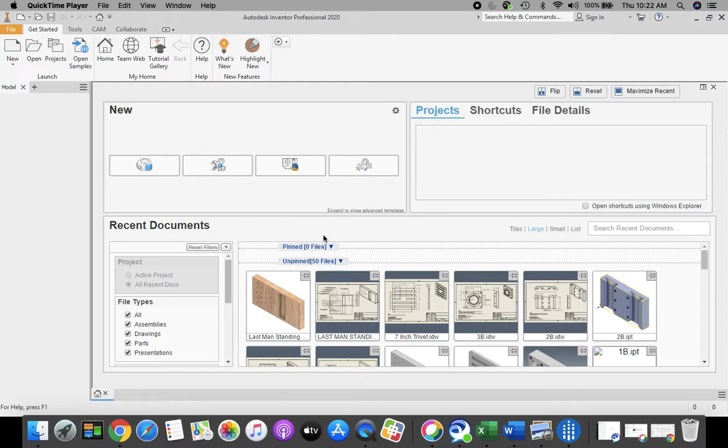Today we're going to take a look at creating the toolpath for your last man standing game so we can cut it on a CNC mill. To begin with that, we're going to come up to our ribbon bar at the top and we're going to select open, and we're going to go to our H drive, first initial last name 000 where you saved it, and we're going to select our last man standing with our last name. Click open and it will load for you shortly.

Now, we're still in the drawing area, the CAD area of Inventor. We're going to change to the CAM area. So if you go up to the top above the ribbon bar, you're going to find these tabs along the top. We're going to change to the CAM tab. Once we're in the CAM tab, the first thing we need to do is go up and set up our toolpaths. So we're going to go up here to the top ribbon bar and we're going to click Setup.

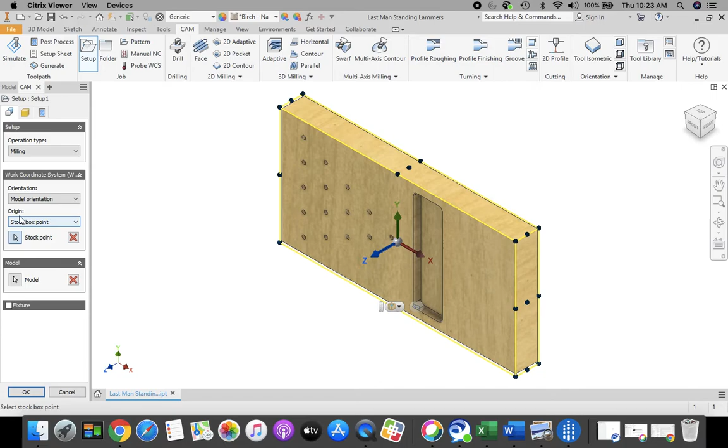Our model browser in the left-hand side of our screen changes. And what we want to do in this menu, we want to work from left to right across the tabs, and each tab we want to work from top to bottom. So this first tab, we're going to change the origin from stock box point. We're going to change it to model origin. That shifts the origin to the lower left-hand corner.

Going to the next tab across, we're going to change where it says stock offset mode. We're going to choose this menu here and we want no additional stock. And you can see that enters in our block dimensions correctly. Then we're going to come to our third tab, and where it says program name or number, we're going to highlight what's there and we're going to type in last man standing and your last name. Once you're finished with that, select OK from the menu at the bottom, and there's our setup folder right in there.

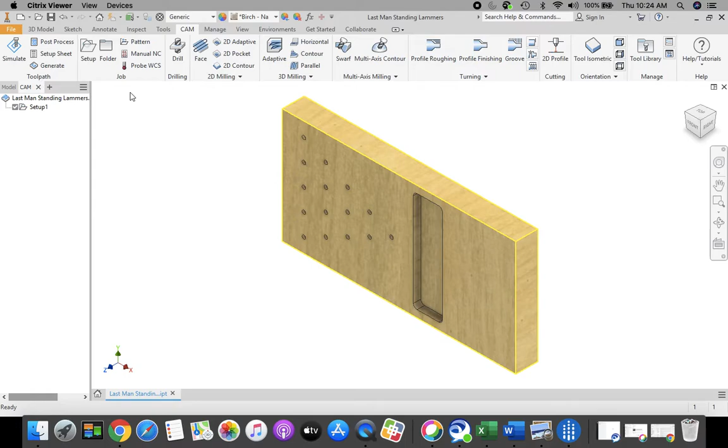The next thing that we need to do is we're going to take a look at drilling the 15 holes that are in here, and then we're going to pocket this area next. So in order to do that, we're going to go up to our ribbon bar and we're going to find our drilling option. Once again, these tabs we're going to work from left to right, touching every single tab, and we work each tab from top to bottom. The first thing in this tab we need to do is select our tool. So we're going to click Tool, and our tool menu is going to open up.

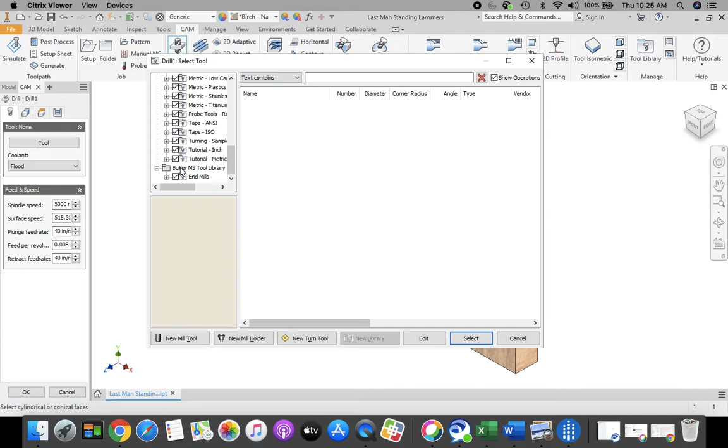Now, we previously added tools to this. If you scroll all the way down to the bottom, you should see Butler MS Tool Library. If you see Butler MS Tool Library, you can come up here and these 3 tools that are in here, you're going to choose tool number 1, which is 1/8 inch flat. If you don't see Butler MS Tool Library, I put them in a different spot for you. You can come up here and you want to find Sample Libraries and go to End Mills. And in the End Mills, you should see those 3 same tools. You want to choose 1/8 inch flat. And then at the bottom of this menu, click Select. And that shows the tool that we'll be drilling with right there.

Moving across to our second tab, it wants us to click the geometry. So we're going to come up and we're going to select each one of these 15 holes as it highlights. Just bring your mouse over the top of them or your cursor over the top of them. When it highlights, click to select it. Once you have all 15 of those clicked, we're going to come across to your next tab.

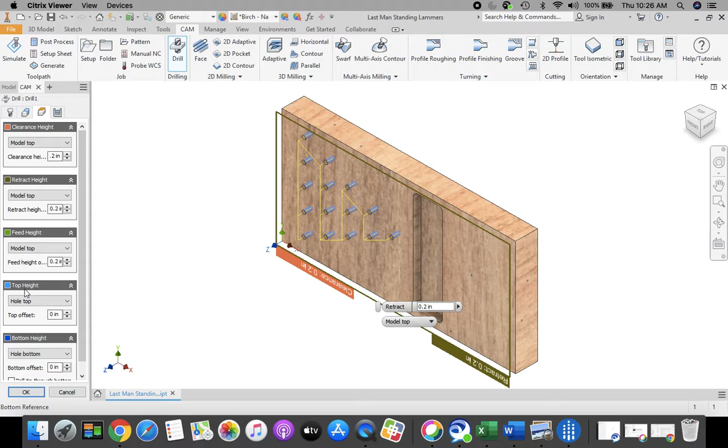On the third tab is when we establish our heights. We need to change these top 3 here. The first one was our clearance height. We're going to change to model top. And we're going to change our clearance height here to 0.2. Second one down, we're going to change from stock top. We're going to change to model top. 0.2 is what we want. And our third one for feed height, we're going to change to model top, and our feed height dimension is 0.2. When you're finished with that, let's go to our last tab across the top.

This one shows us that we're doing a drilling and that it's going to retract after it's done. Once you have those 4 tabs edited, we're going to come down to the bottom in this menu in our browser and we're going to click OK.

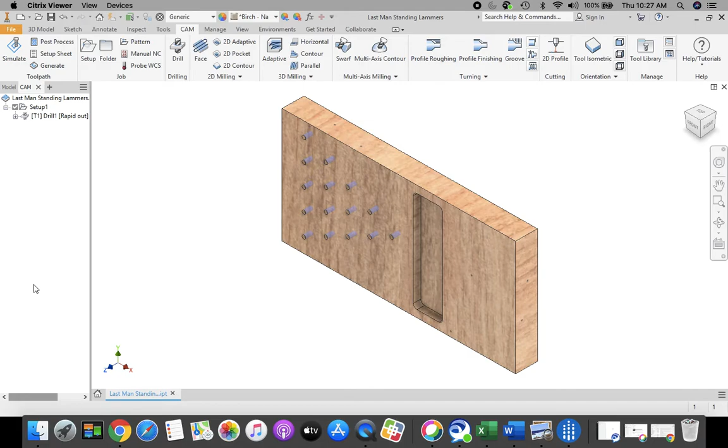If you would like, you can come up to the top for this operation, click Simulate. And then down here in the bottom of your screen, if you click play, it'll show you what that tool is doing to drill the holes. Pretty cool. Next, we're going to click close in this bottom left-hand corner of the menu.

Close out of simulation. Now we need to run the toolpath to cut this pocket for the peg storage. So we're going to come up to our ribbon bar at the top and we want to find 2D pocket. In our 2D milling area, find 2D pocket. Click to select it. Once again, these tabs across the top, we're going to work from left to right, and each tab we're going to go from top to bottom.

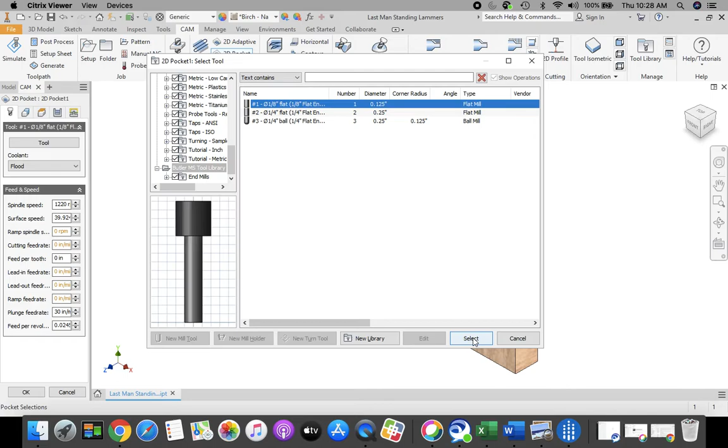The first thing we're going to do is choose our tool. Once again, you're going to scroll all the way down to the bottom to Butler MS Tool Library and select 1/8 inch flat, or you're going to go to the end mills in sample libraries and choose 1/8 inch flat. They're the same tools. Click select once you have that identified. Shows our tool again. Once our tool is selected, we're going to go across to our second tab where we're going to choose our geometry.

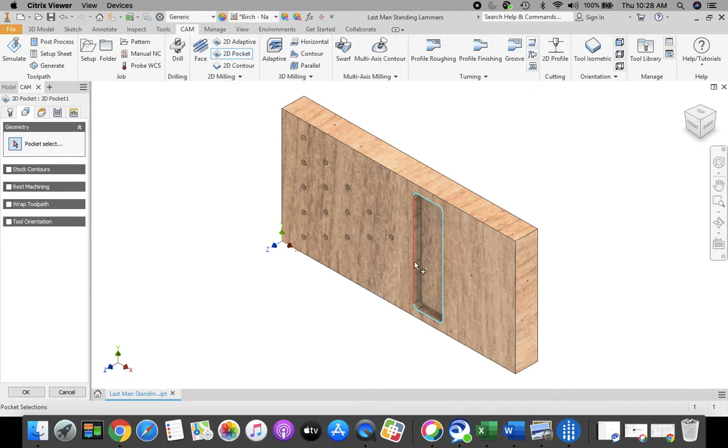Now when we choose our geometry, bring your cursor into your screen onto your part, and we want the bottom of that pocket identified. Make sure you're not clicking the outside edge or the side or the top edge. We want this bottom part highlighted and click. Going across to your third tab.

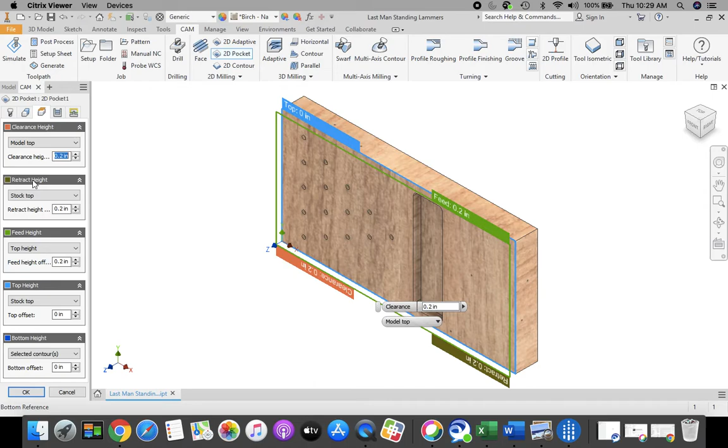We're going to change these top three once again, just as we did in the other one. We're going to change clearance height to model top, and this is going to be 0.2 for the dimensions. Retract height, we're going to change to model top and 0.2. Your feed height, we're going to change to model top and 0.2. Once you have those selected, we're going to move on to our fourth button, or fourth tab across.

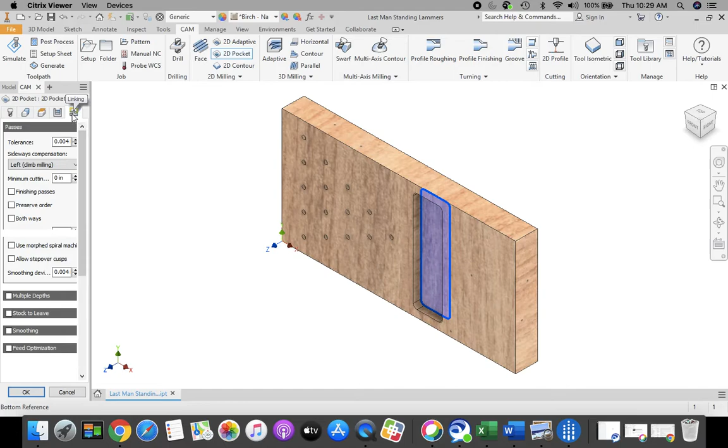In this one, we want to uncheck stock to leave. So we're going to machine right to the edge of our box. We're not going to have any additional stock. Moving across to our last tab, we're going to uncheck lead in, uncheck lead out, and we're going to change our ramp style from helix to plunge. Once you have those selected, click OK. And it's going to process those up here.

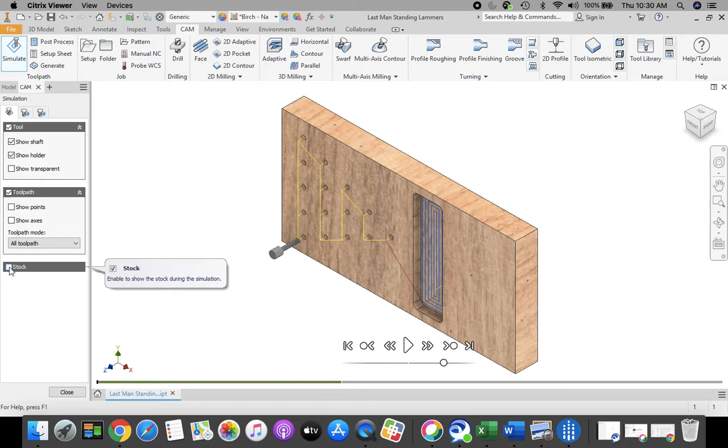When you're done, in order to see the whole tool paths run, click your setup, one over here in the model browser. Click simulate, that selects both of those operations. We can click stock over here on the left hand side. That turns your stock on, and then when you click play, it's going to run through and it's going to show you your tool paths as if the CNC mill is cutting it out.

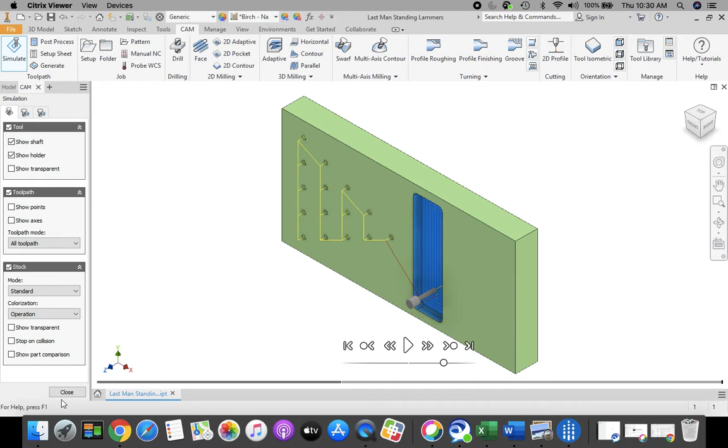Great job. Next thing that we need to do is we need to post-process this. Before we do that, we're going to close out our simulation window. Click close in the bottom left corner here. And we're going to come up to the top next to simulate, and we're going to select post-process. Here what we want to do is make sure this is saying 1_Butler MS Techno-Isel. That's the type of mill that we have.

We also want this output folder. We're going to change this. We want this to go to your H drive. So from the menu at the top, nothing's showing up here. So if you have nothing showing up here from the pull down menu at the top, we're going to go over to the side menu and we're going to select your first initial last name 000, your H drive.

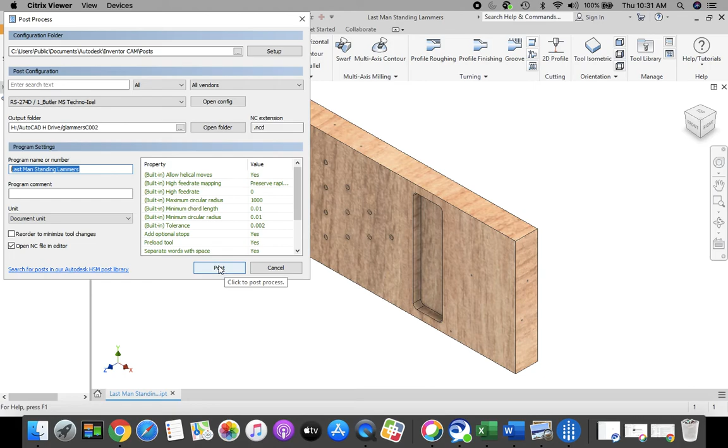And I am going to put this in my H drive. Okay, it doesn't look like anything's here, even though there is. We're going to click select folder. And then last man standing and your last name should be typed in there. If it's not, highlight this here and enter your name and last man standing. When you're finished with that, select post. Click save.

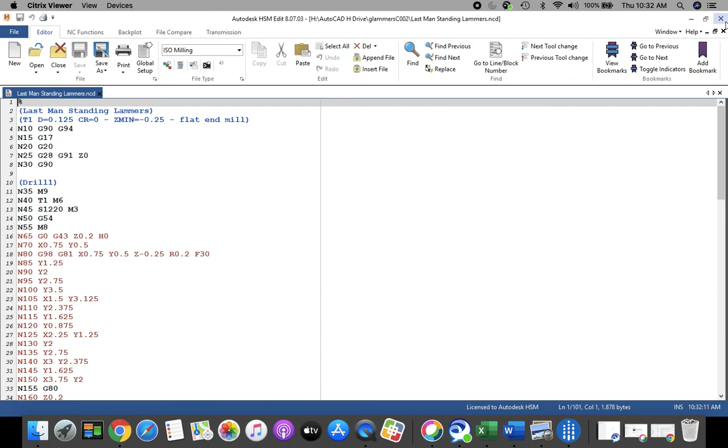And this editor window opens up that shows you all your M and G codes and coordinates here in the left hand side. You can see your name at the top of it. This window, when it opens up, click the X in the upper right hand corner to close it out. Now we're going to go up to File in the left hand corner and we're going to save, and that updates our part to have all the tool paths.

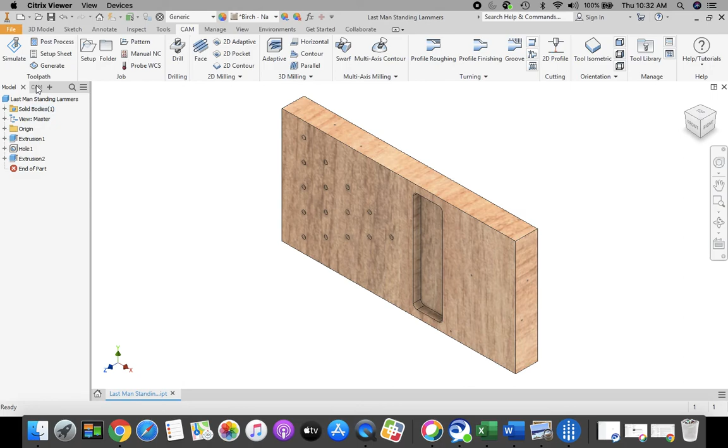So right here what we're looking at is the CAM area. That's the toolpaths that are run by the machine. And the next tab over, our Model tab, shows us all of our drawing commands. Make sure you go to File and Save. Congratulations, you're now ready to cut your part.